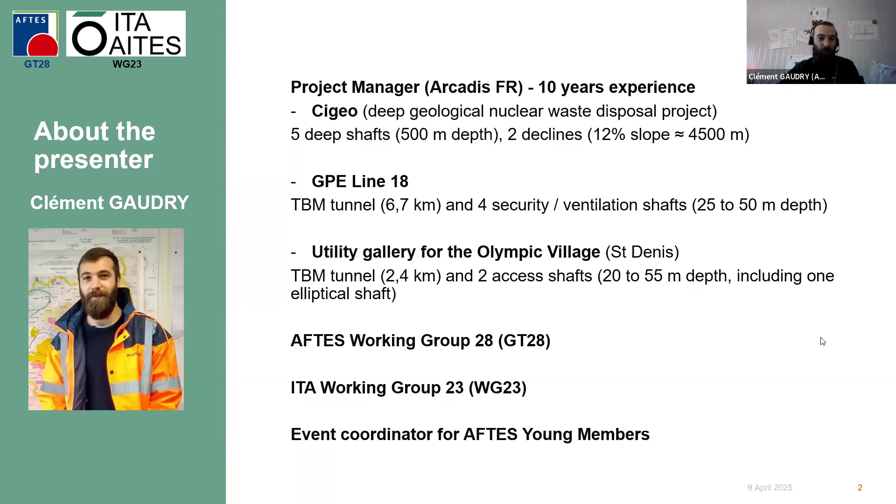A couple words about me that has already been presented by Siamak. I'm a project manager for Arcadis in France with 10 years of experience, involved in some major projects, mostly in France, and also involved in AFTES ITA, promoting the underground work to the younger generation through AFTES young members. So I'm an event coordinator.

A few words about AFTES. It's the French Tunneling and Underground Space Association that was created in 1972, so more than 50 years ago. It has more than 1,000 active members and currently 26 active working groups.

These working groups have been publishing more than 100 recommendations in French, and 60 of them have been translated in English. So not doing so bad with the translation so far.

AFTES is organized with 7 operational committees and 3 regional delegations, and the subjects being treated in the organization are very diverse. You can see we have subjects like planning, socioeconomic, legal aspects, ground conditions and geotechnical conditions, TBMs, conventional tunneling, blasting and mucking out. We have grouting and waterproofing, and transversal tasks, even maintenance and rehabilitation. So all the aspects related to underground works are covered by AFTES and the working groups.

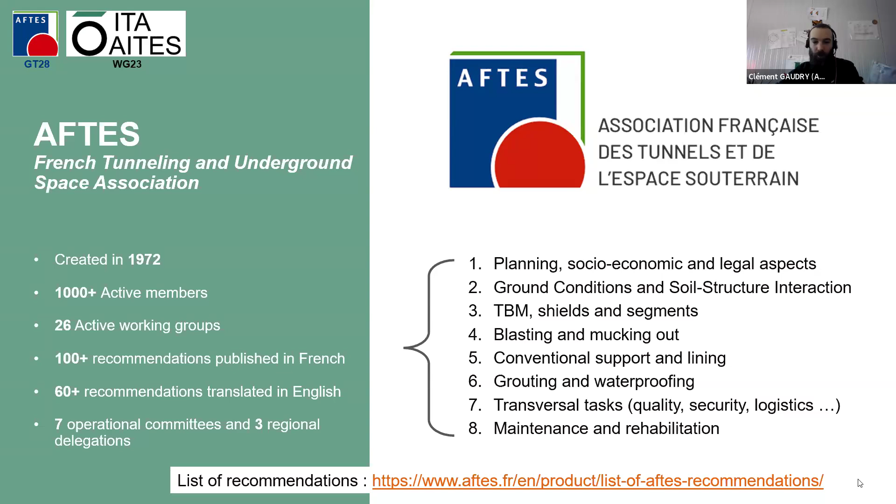So you will find here the list of the recommendations that have been published and the ones that are available in English as well.

This slide is to summarize the main references that exist about shaft design and construction, and that are the references we've been using mostly for the recommendations. So the first one is a handbook, the Tunnel Engineering Handbook, that has been published in 1996.

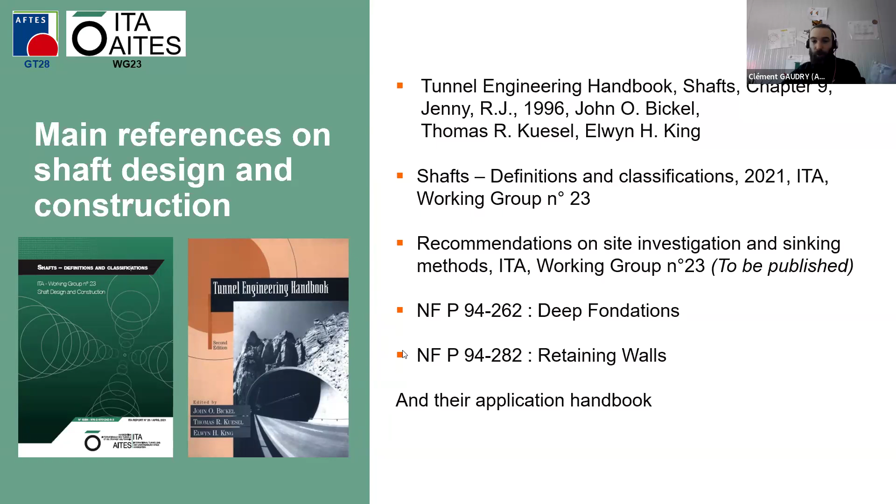We have the work of Working Group 23 from ITA that has been presented already by Siamak, so the definitions and classification recommendation published in 2021. A couple of recommendations to be published, I heard this year from Siamak, about site investigation and sinking methods, if I'm correct. We are also using the Eurocode 7 and the application norms, which are NF P 94-262 about deep foundations and 282 about retaining walls, and of course their application handbooks.

So as Siamak presented, we have two recommendations that have been published, one on deep shafts and inclined galleries, published in 2008, only available in French, and one on shallow shafts that is quite recent, published in 2023, and has been translated in English.

So what do we consider to be a shaft? It is a vertical or subvertical structure with the depth greater than the width, meaning it has a slenderness ratio greater than 1.

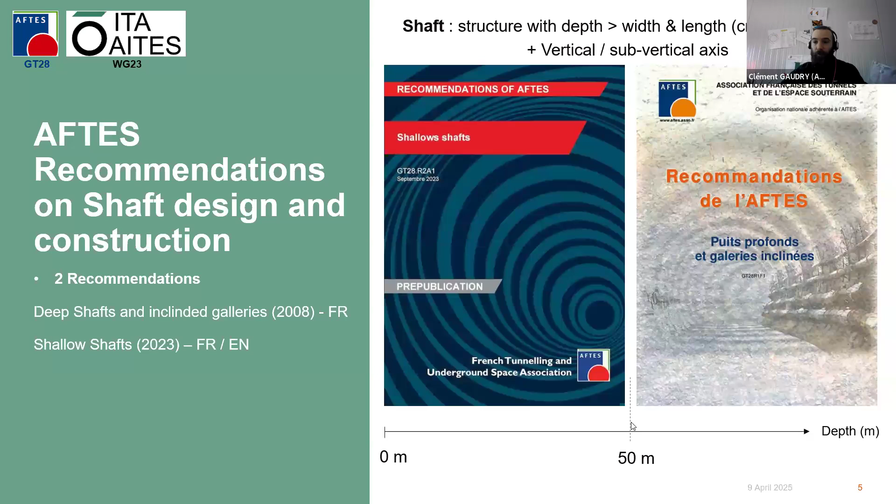The limit that we set between shallow and deep shafts is around 50 meters. Why this boundary? It's not really a strict limit, but it's based on feedback and experience. We found that under 50 meters depth there was no requirement to guide handling loads in the shaft, and safety standards would allow personnel to work during the excavation phase. This allows for the use of conventional civil engineering equipment and more traditional methods used in retaining walls.

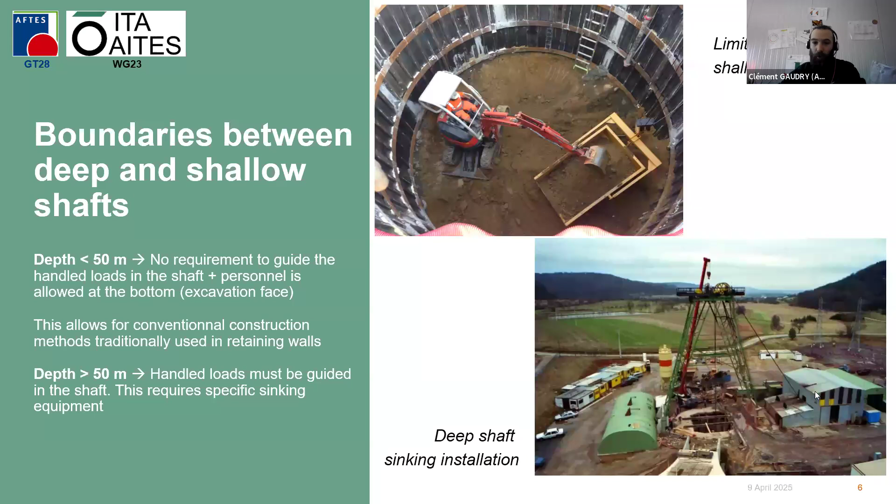Above a depth of 50 meters, what we'd see is guiding the handling loads in the shaft and specific sinking equipment. As an illustration, you can see on the top picture very simple equipment for a shallow shaft, and a whole equipment with a steel framework structure, winches, cables and everything for a deep shaft.

In terms of functionalities, we can set some differences between deep and shallow shafts. Shallow shafts are more accessible in terms of construction cost and planning duration. They don't require specific equipment and allow for a wider range of projects. For example, the project I'm working on right now, line 18 of Grand Paris Express - for a 35-kilometer metro line we have 22 service shafts, all of them shallow shafts.

Deep shafts, on the contrary, are long-term, higher cost, and higher risk projects, which makes them less common. As an example, in France in the last decade, I think we had about 2 or 3 projects total - very unusual projects.

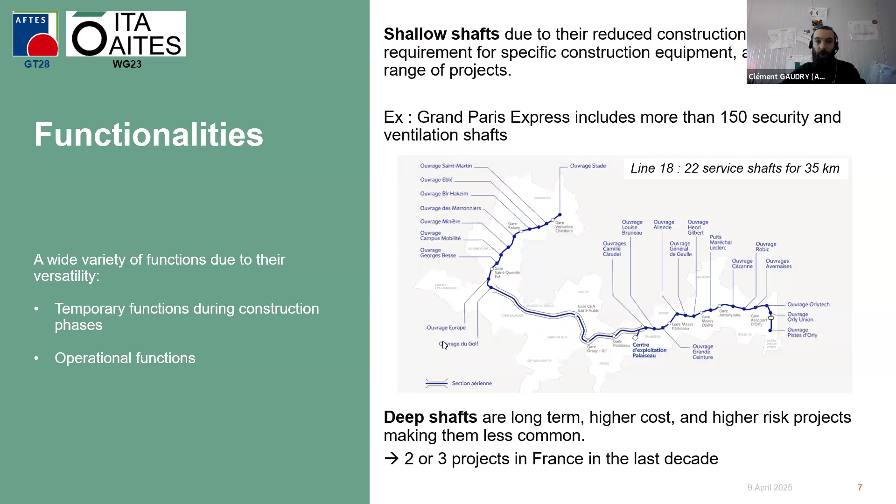That brings us to the first recommendation about deep shafts and inclined galleries, published in 2008. The goal of this text was to preserve the knowledge on shaft sinking, because the context was a scarcity of projects in France after the deep mines were closed, after the industrial era was ending.

The text was mainly focused on the construction methods and the equipment associated, and it does not cover shallow shafts, so less than 50 meters depth.

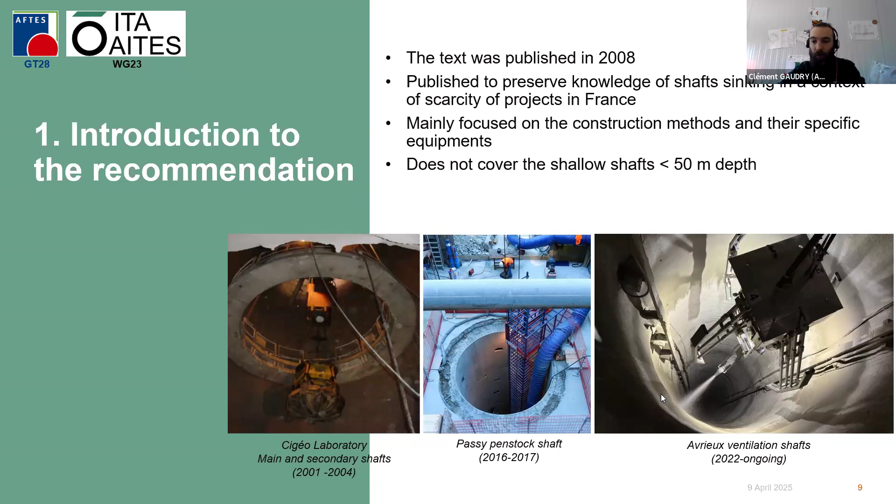You can see the last main projects of deep shafts that have been achieved in France: the CIGEO laboratory for future nuclear waste disposal, the Passy penstock shaft for a hydroelectric project, and the Avrieux ventilation shafts for the Lyon-Turin project.

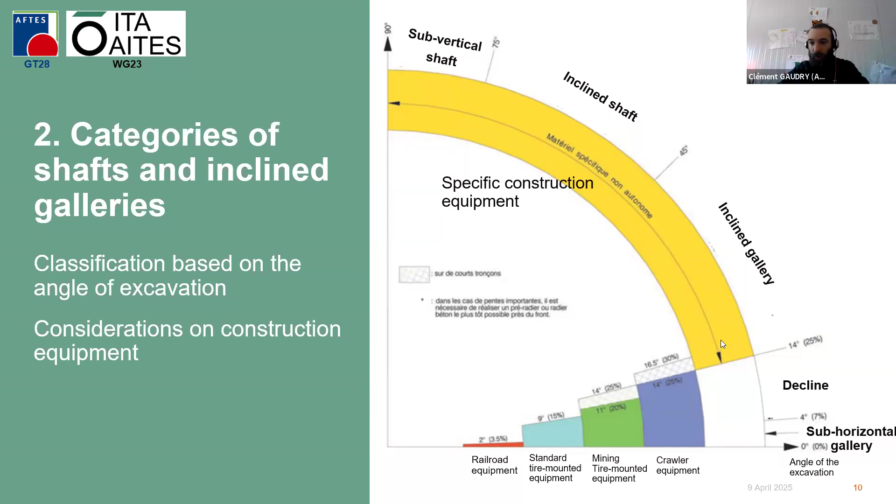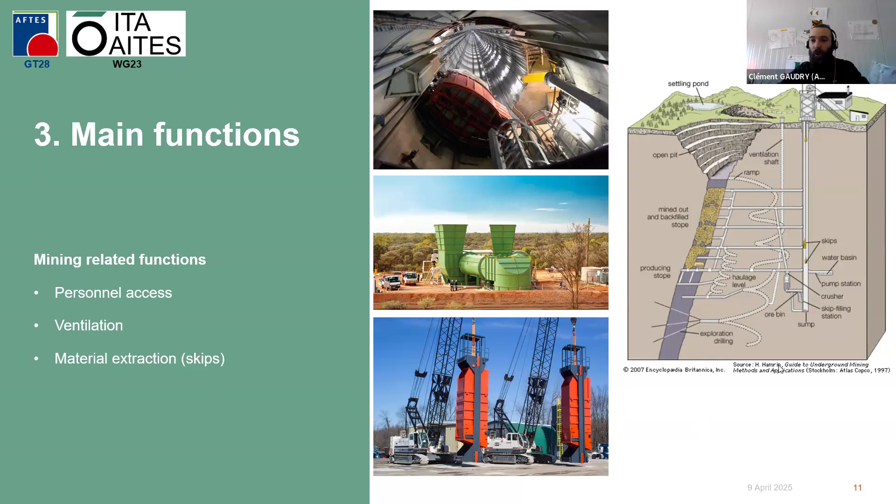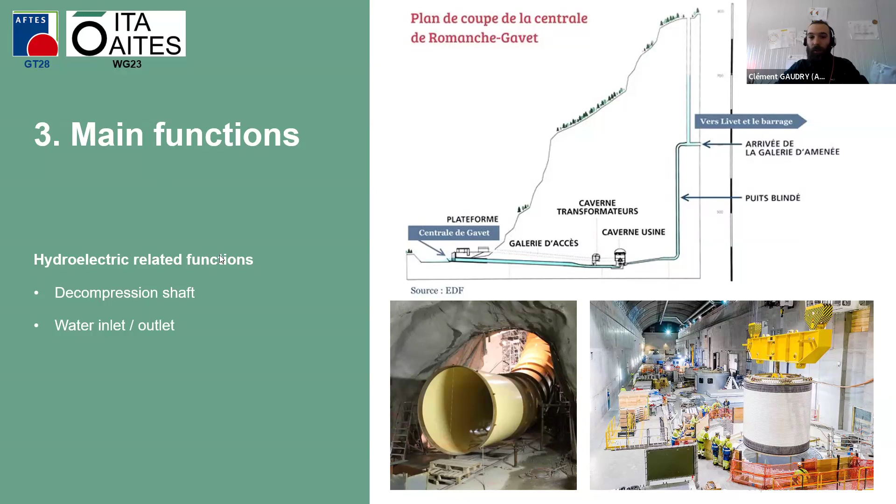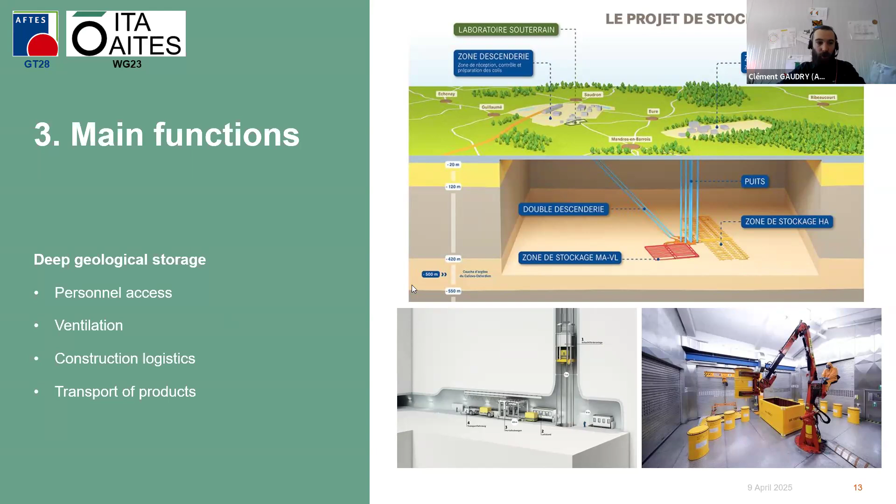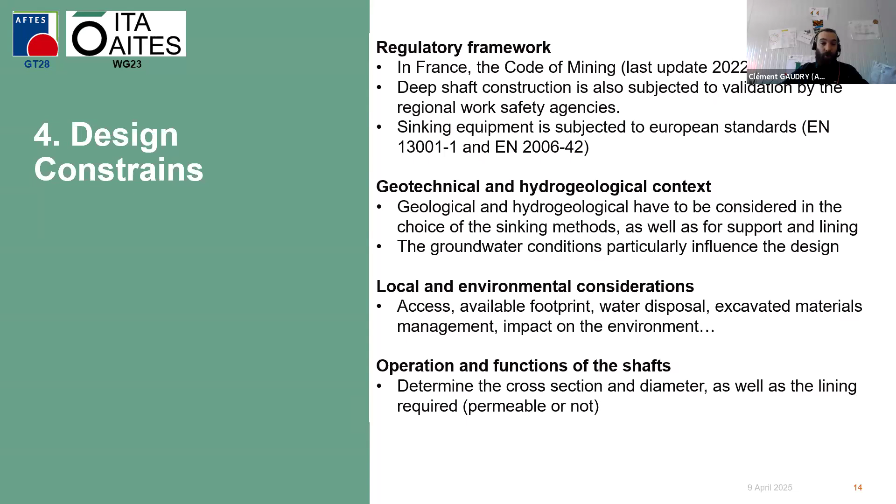The functions of the shaft in operation and also in temporary functions usually determine the cross section and the diameter of the shaft, and also the lining required, so whether it's watertight or not.

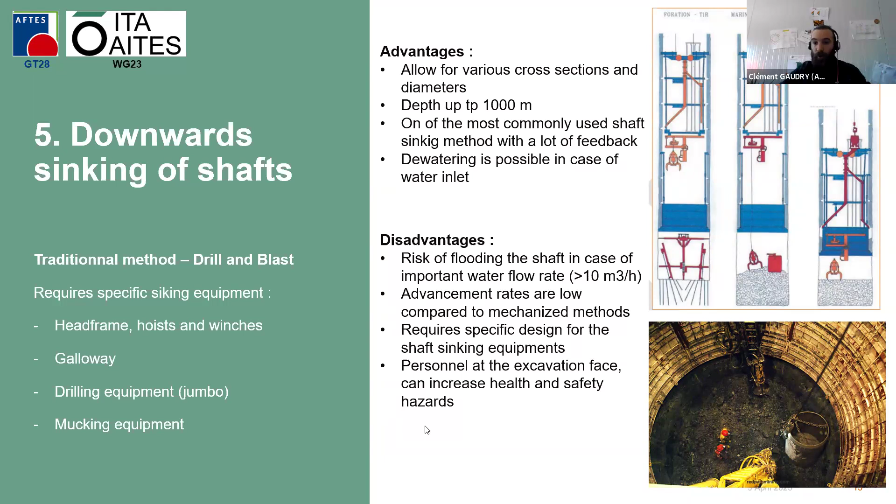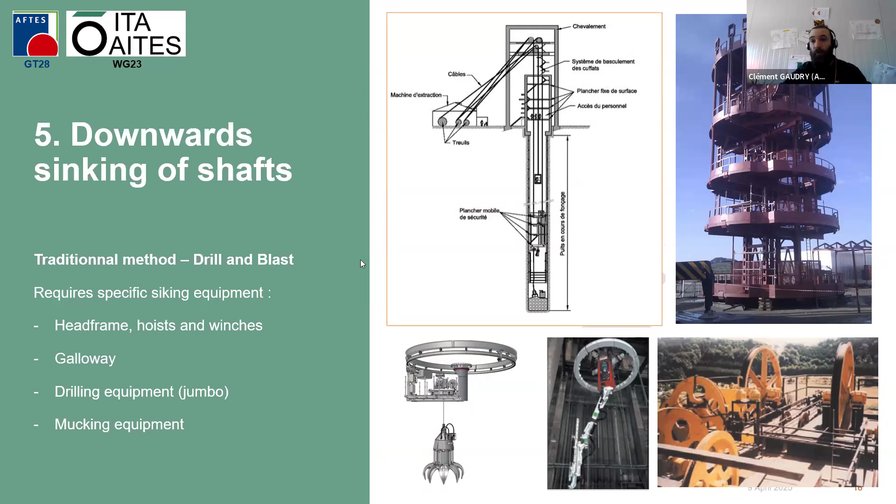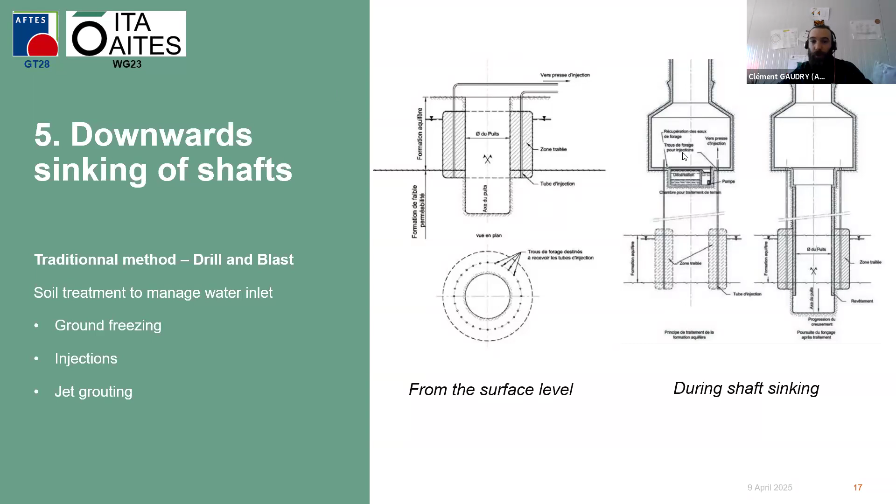I was mentioning the control of groundwater to manage the water inflow in the shaft during construction. In a conventional method, when the groundwater is near the surface, you use injections, ground freezing, or even jet grouting techniques to reduce the permeability of the ground. When it's a deep aquifer, you have to excavate a chamber to allow for pre-treatment before continuing the shaft sinking.

The lining and support usually associated with this technique, in terms of support, is quite similar to conventional tunneling: bolts, wire mesh, shotcrete, steel ribs. The main goal is to avoid instability of the shaft wall and to protect the workers. The lining, depending on the functions of the shaft and the geological conditions, can be cast concrete, so not watertight, or steel casing for watertight projects. Precast segments are also something that's been used quite a lot in shaft sinking and lining.

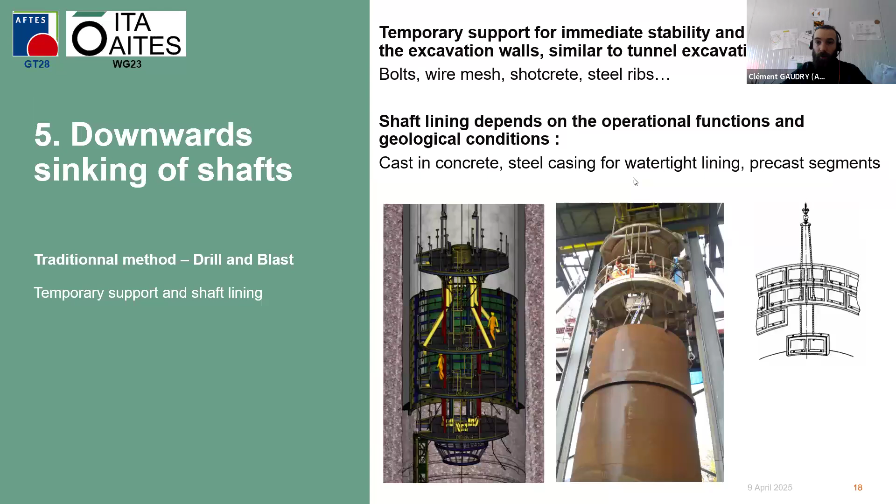The second method is what we call shaft drilling, or 'big hole' in French literature. It's basically drilling equipment, but bigger size, as you can see. The excavation is achieved in water or bentonite slurry, which allows for removal of the muck that is transported by the bentonite and then treated at a treatment plant, same as a slurry TBM.

This technique is interesting because it has good advancement rates. The bentonite can stabilize the shaft walls and also control groundwater inflow. The equipment is reusable for many projects, and you have no personnel at all in the shaft, so it's quite good for health and safety.

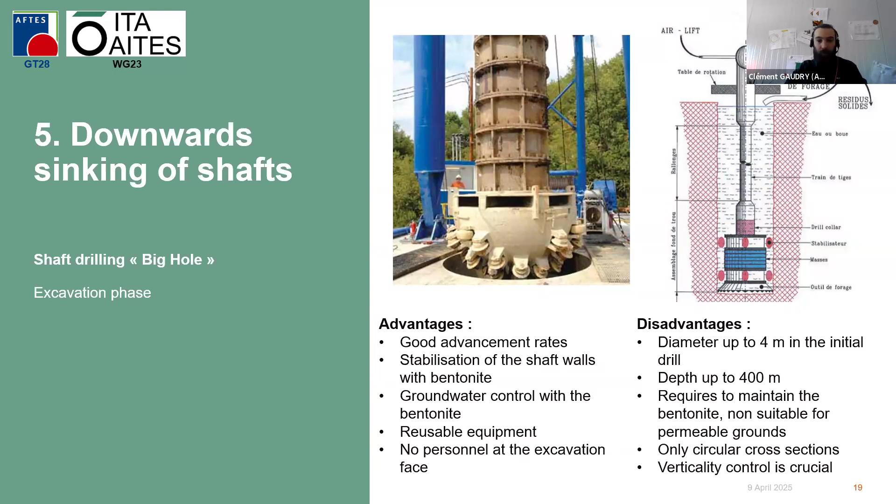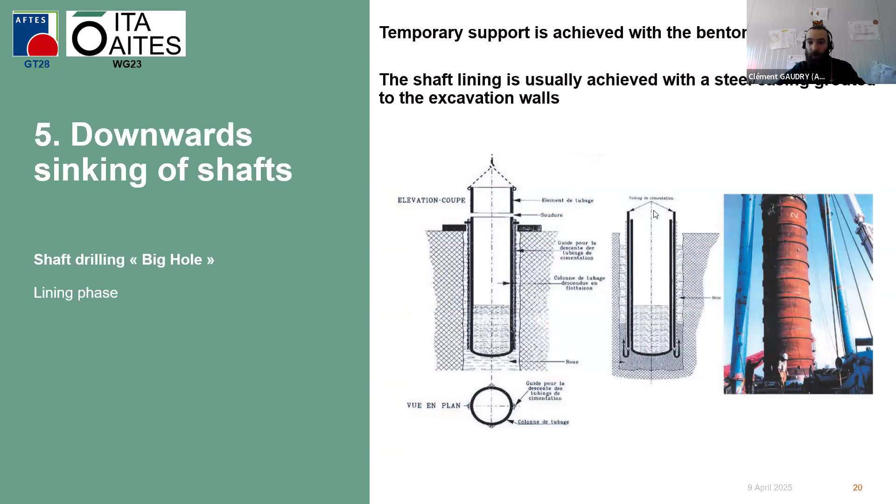And as with any drilling operation, verticality control is very important. The type of lining associated with this technique is usually a steel casing that would be installed in the bentonite and then grouted to the wall of the shaft before removing the slurry from the excavation.

Another downward sinking method is a mechanized shaft sinking method that has been developed by Herrenknecht quite recently. It's quite interesting because it can have faster advancement rates, and it's also safer for the workers because no one is at the front.

Here is a specific phase where the machine is not working, but usually the excavation arm works independently, doesn't need anyone at the front. And it's also more adaptable to different geological conditions.

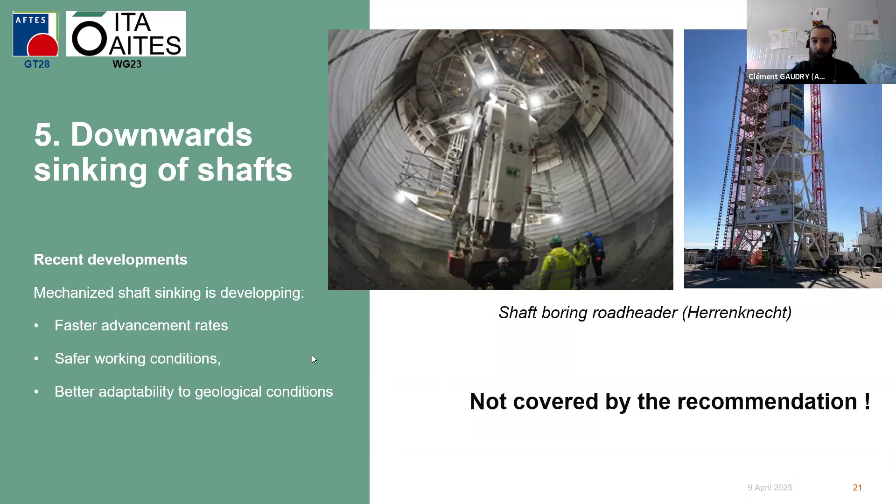This is not covered by the recommendation because it's quite a recent development, so it didn't exist at the time of publication of the recommendation.

So the second type of methods are the pilot hole sinking methods. It's basically raise boring, which I think is quite common and widely used, and shaft enlargement methods, either mechanical or with drill and blast, also exist.

These methods are interesting in terms of advancement rates. The equipment is also quite reusable from one project to another, and because it's mechanized you have very limited personnel, no personnel at the excavation phase. The equipment for raise boring is quite limited and can be installed in very small, very reduced footprint areas.

The disadvantages are the diameter, which is limited up to 5 meters in the initial drill. The depth for raise boring is also limited because of the possible deviation of the pilot hole.

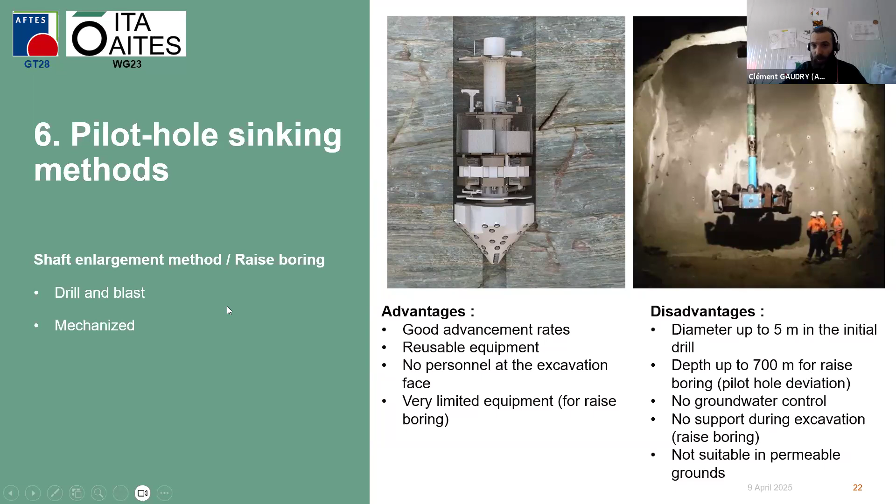You don't have any groundwater control -- that's a big problem for this kind of method. So in aquifers and permeable ground, it's not so suitable. And there's also no possibility to install support during the excavation with raise boring.

Incline galleries are mostly techniques derived from shafts or other methods. Here you have some illustration of a TBM for an incline gallery, and here a machine that is an auger boring machine.

Here are some methods that look quite similar to the drill and blast method, with some kind of working platform down the gallery, and here a head frame to suspend it.

And another method, I think that wouldn't be used anymore nowadays, is what we call in France the Alimak method, from the company building these machines, which is basically an elevator on a rail that travels usually upwards, to sink the gallery from the bottom upwards.

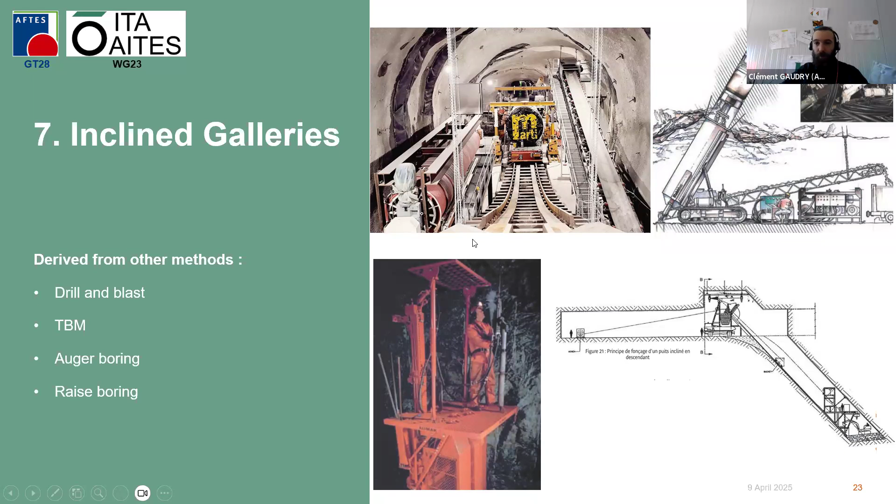The recommendation also includes some considerations for dimensioning. They're more general considerations about the loads that have to be considered for the dimensioning of both the support and the lining.

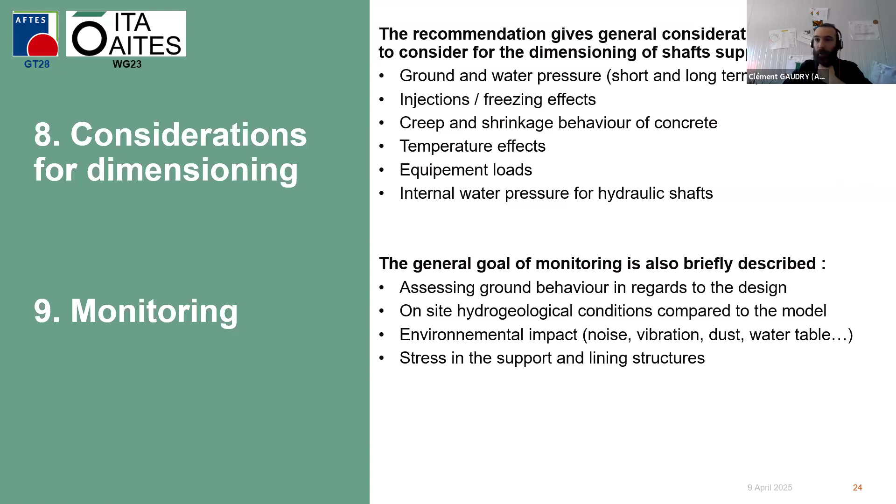Some aspects of monitoring are also discussed in this recommendation, but it's not a very developed part of the text, I would say.

The text also includes some appendices. The first one is a table with some shaft sinking references using different techniques -- quite complete, and mostly European references, but they go back to the 1950s or so. So quite a big body of work has been achieved with these tables.

There's also a comparison of the different sinking methods regarding different criteria: the conditions that are adequate for each method, the main characteristics associated with each method in terms of diameter, depth, the ground resistance that is allowed, the quality of the works, verticality, the excavated walls and whether they are regular or not, and the damage to the rock mass that can be caused.

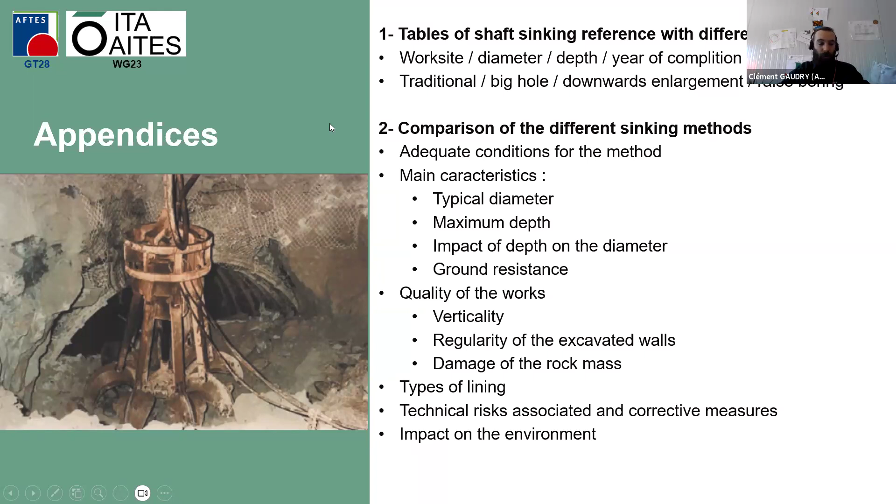Types of lining associated with each method are also mentioned, as well as the technical risks for each method and the main corrective measures that can be set. The last criteria is the impact on the environment. So quite a complete table, very useful, I think, for the selection of the sinking method.

Okay, so that sums it up for the first recommendation. I will now go through the second one, on shallow shafts.

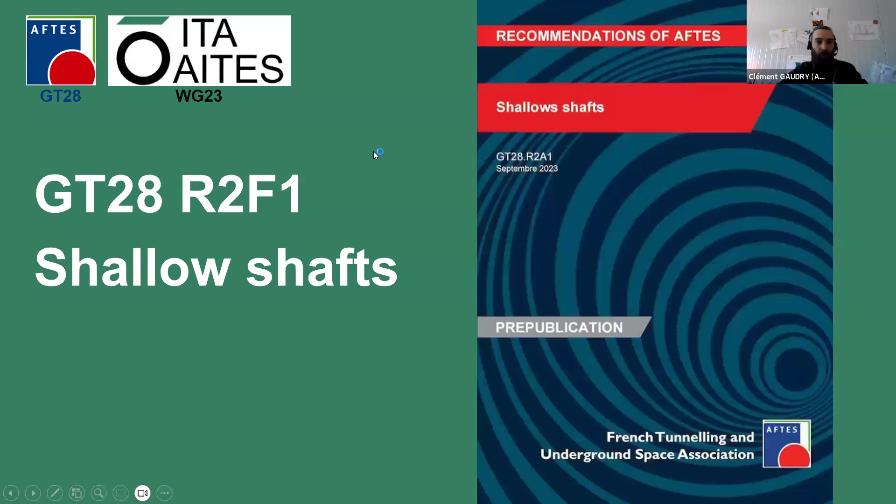I didn't participate in the first recommendation, but this one I've been part of it, so I know a little bit more about the history of the text. There was a first version that was published—I mean not published, but initiated right after the deep shaft recommendation.

It was submitted for review to the technical committee of AFTES but was not accepted. The main reasons were that the focus was mostly on construction methods, as the first recommendation was. It didn't really develop the dimensioning aspects, and it was a bit too general, not highlighting the specificities of shallow shafts.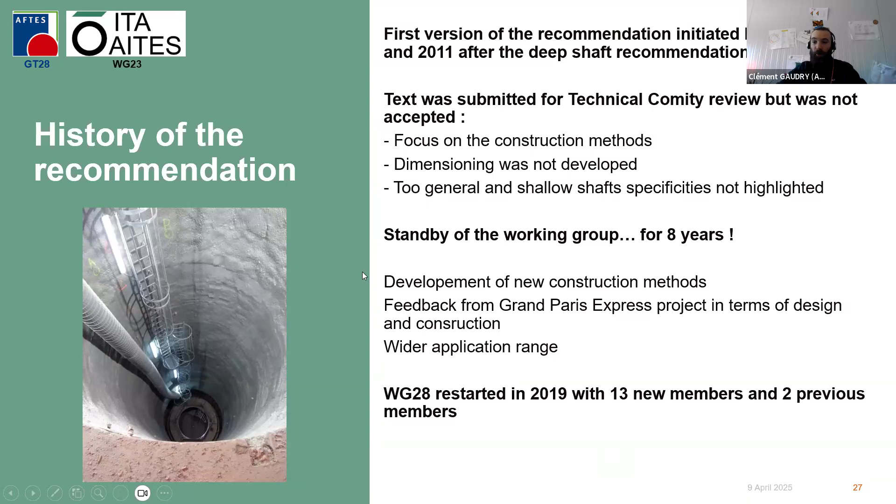That resulted in the standby of working group 28 for 8 years, quite a long time. Eventually, because recent projects brought feedback, new construction methods were used, and the application range, as I was presenting before, is more important than deep shafts. So it was decided to restart working group 28 in 2019 with 13 new members and 2 previous members, with the same animator, Pascal Guédon.

Here are the 15 members of the working group. What's interesting is to highlight that there were 3 young members under 35 years old—very diverse, from design companies, construction companies, a person from a control agency, and a shaft construction expert with more than 40 years experience.

We started the work in September 2019, right before the COVID-19 lockdown, and held 15 meetings over 2 years. That brought us to send the first consolidated version in December 2021, two years after the start of the working group, and the finalized version after review was published in May 2023.

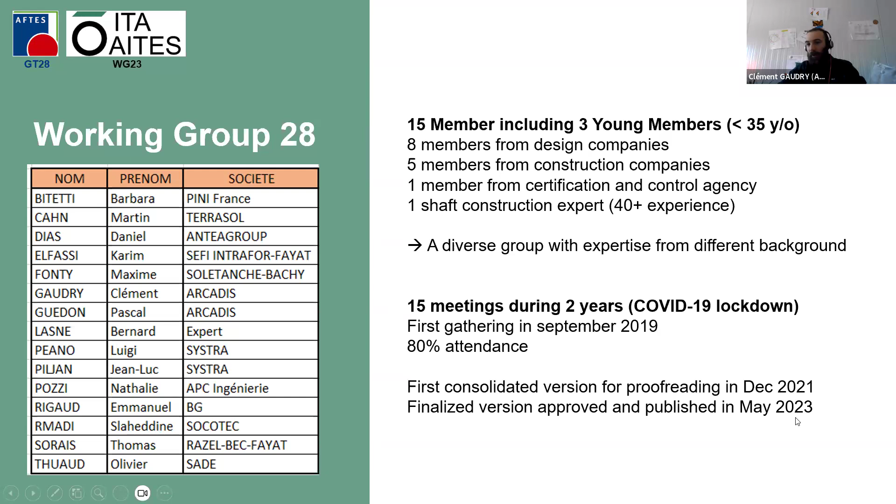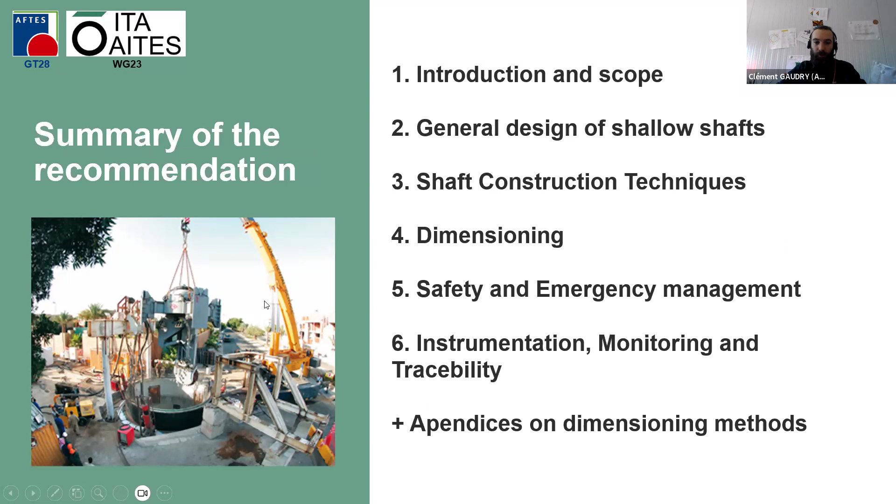So I will go into the different chapters of this recommendation and give you a bit of an overview of what they contain. The scope, as I said, is about shallow shafts, so under 50 meters. From the beginning, we wanted to set that the excavated diameter should generally be greater than 3 meters.

That's not an obligation, but we thought that for safety reasons it's wiser to go for bigger diameters. The largest dimension in the horizontal plane is less than 50 meters—that's the rule of the slenderness ratio, which should be greater than 1.

We didn't want to include public access structures because they have specific crowd management considerations that are not covered in the recommendation. It's important to note that this text can be applied to the upper part of deep shafts, the shafts that are used to introduce the shaft sinking equipment.

Here is a picture of a project that is actually not a shallow shaft—it's the IGR station in the Grand Paris Express project. It's a 63-meter diameter and 55-meter depth, so the slenderness ratio is less than 1. But eventually, the concepts developed in the recommendations can still be applied to this kind of structure.

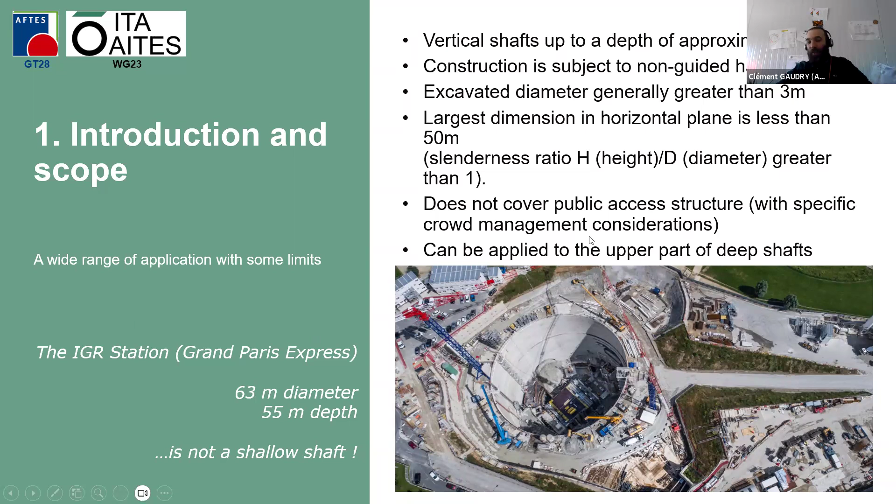In terms of functions, as I said before, shallow shafts have a wider range of use, either temporary or operational. You can see here, for example, a TBM launching shaft, here a typical access, and here an emergency exit and ventilation shaft that's apparently also used as a TBM dismantling shaft.

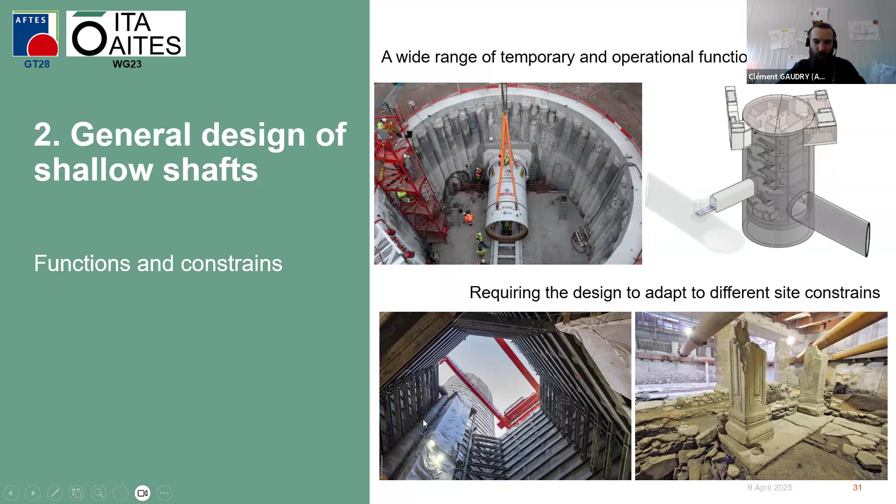Because shallow shafts have a wide range of functions, they also require adaptation to different site constraints. You can see on the first picture, for example, a shaft that's been achieved right under, I think, a 20-plus story building.

Because of these very different environments that we can have for these kinds of projects, data collection is very important, and we defined what we call the shaft model. As you can see here, it's a scheme that includes all the main information that would be required for a shaft project—geological, hydrogeological context, the geotechnical surveys, and the existing structures.

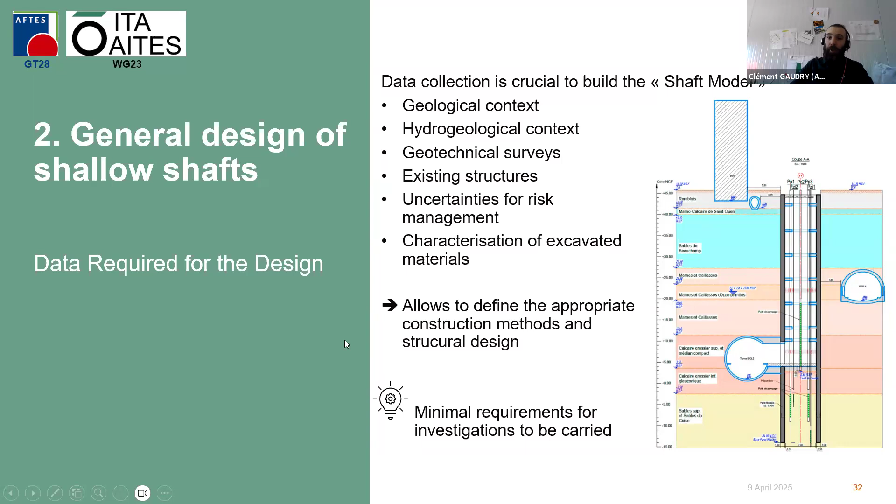You can see here a building, here an underground network, here another metro project or existing metro. It can also include uncertainties for risk management, whether the thickness of a soil layer or the level of the groundwater. Another important aspect nowadays is the characterization of excavated materials, which allows us to define the construction methods and structural design of the shaft. In the recommendation, we define the minimal requirements for investigation that has to be carried out for a shaft project.

This slide gives definitions of the terms. I think you would probably know these terms if you're in the tunneling industry, but we wanted to give a proper definition. The support is what you would install during excavation to stabilize the walls. The pre-support is installed before excavation—that would be, for example, piles or a slurry wall. And the pre-treatment would be methods that improve the characteristics of the ground, either mechanical characteristics or permeability.

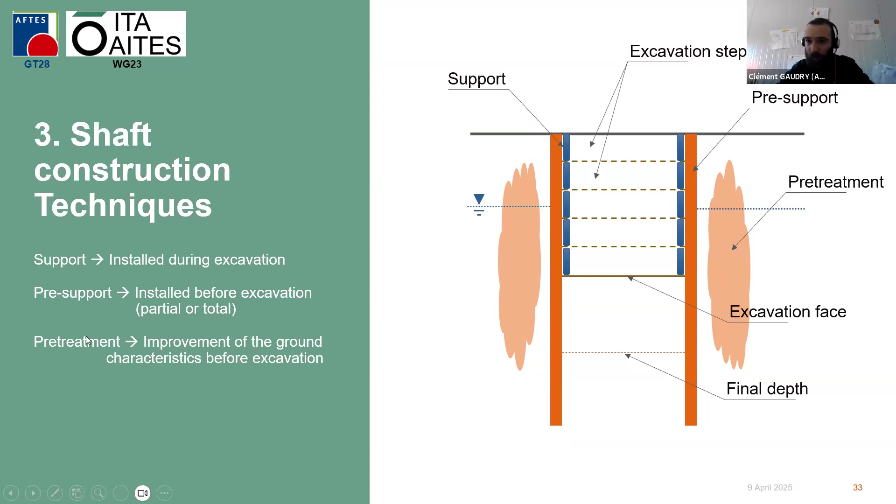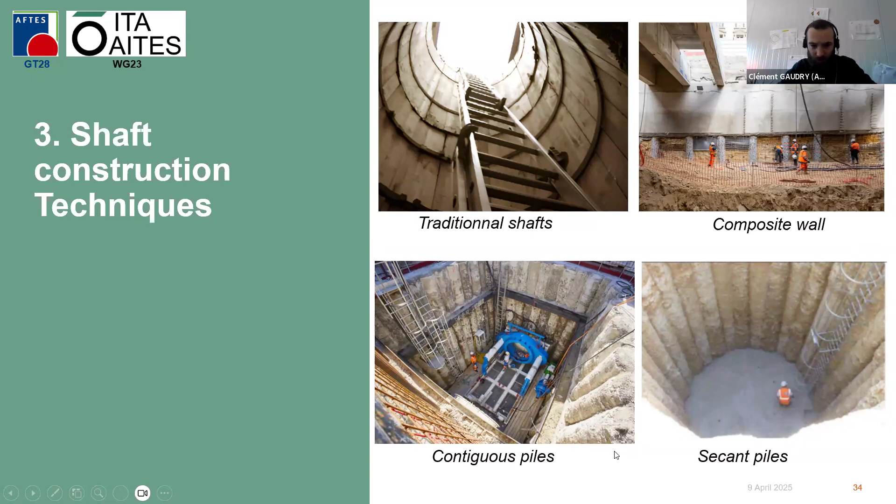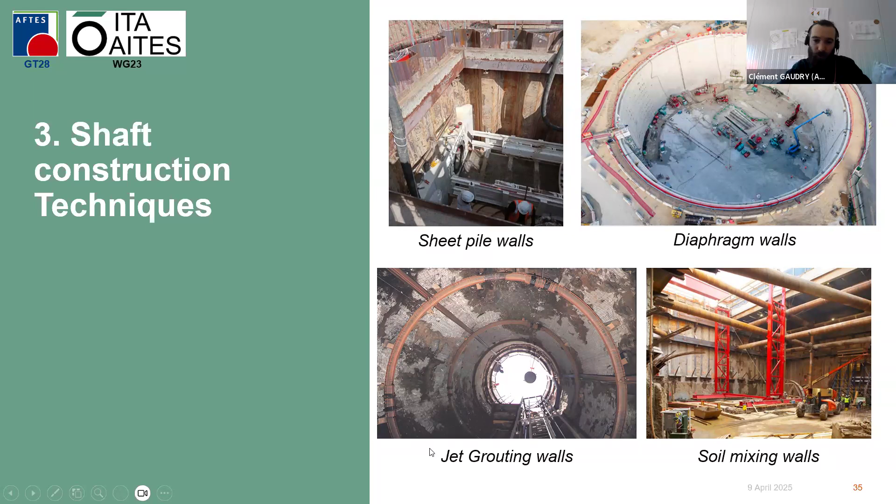The way we divided the different construction techniques is either by pre-support or pre-treatment, and we put them into each category. We have the traditional shafts that only have supports as the excavation is carried, composite walls with partial pre-support which could be piles or steel beams, contiguous piles, secant piles, sheet pile walls, diaphragm walls, jet grouting, and soil mixing as well, which are in between pre-support and pre-treatment.

We also have techniques like ground freezing that are carried out for shafts in water conditions, and a technique called caisson shafts, where you sink the lining as the excavation advances. This could be the traditional method, or the mechanized version developed by Herrenknecht, the vertical shaft machine, which is a caisson shaft with a mechanized excavation arm and hydraulic mucking.

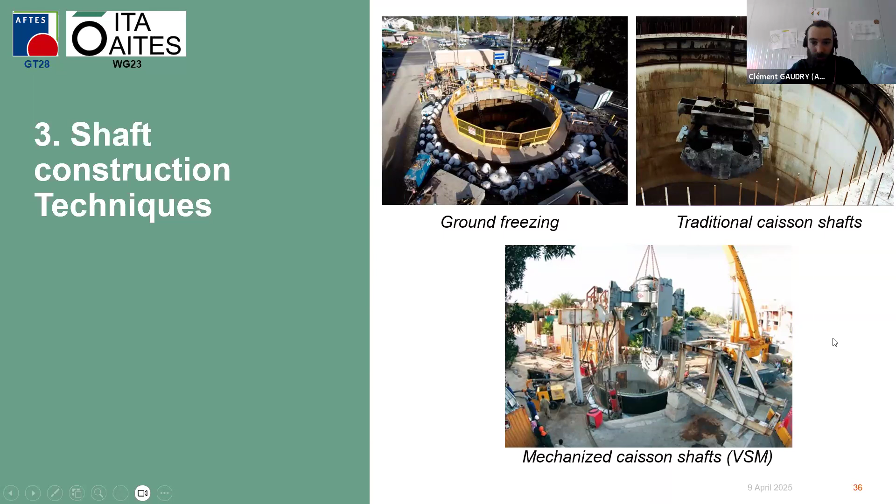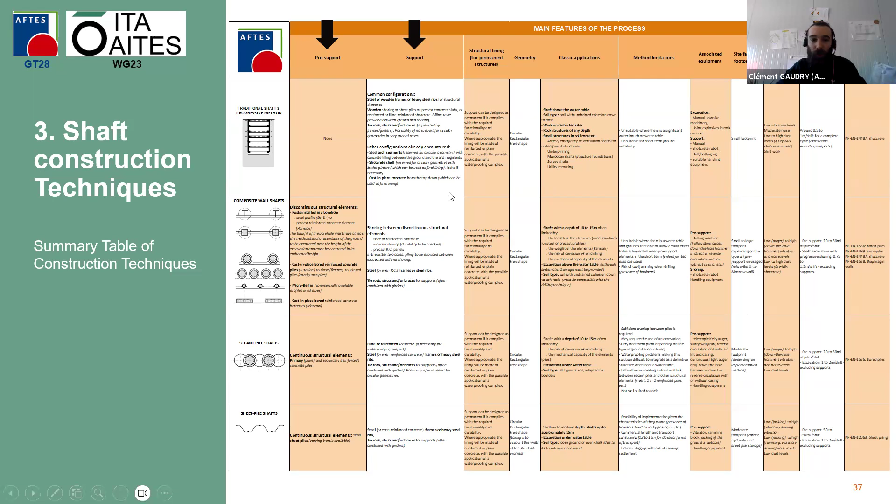We summarized all these different methods in a table, giving information about the pre-support or support included in the method, the structural lining associated, the geometry we can achieve, the classic applications, the limitations of each method, the equipment usually used for the works, the footprint required, the nuisance associated, the construction speed, and lastly the applicable standards in the European and French context. So it might not be applicable everywhere in the globe, but still interesting.

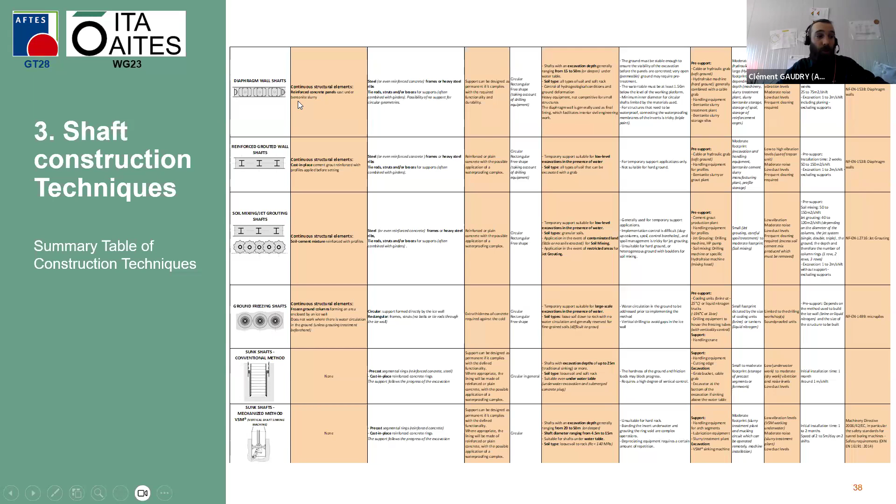So all the methods that I presented before are covered in this table. It's really a great tool to help decide which method to use for construction of a shaft.

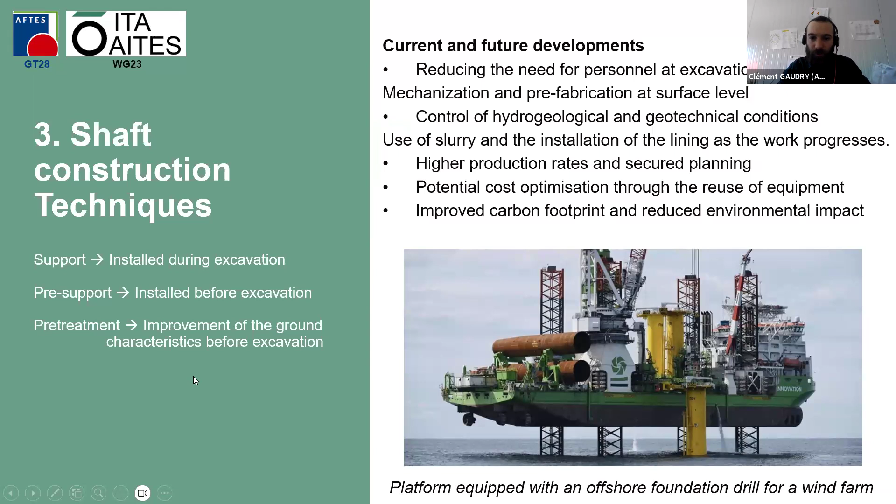We also have some considerations for current and future developments, mostly considering the mechanization of shaft sinking, and some aspects about the cross section of shallow shafts. Because the structural constraints are not as much as for deep shafts, it allows for optimization of the section into various shapes. As you can see here, rectangular cross section, here something that looks like a keyhole, an elliptical shaft, a bilobed shape - very different types of cross sections.

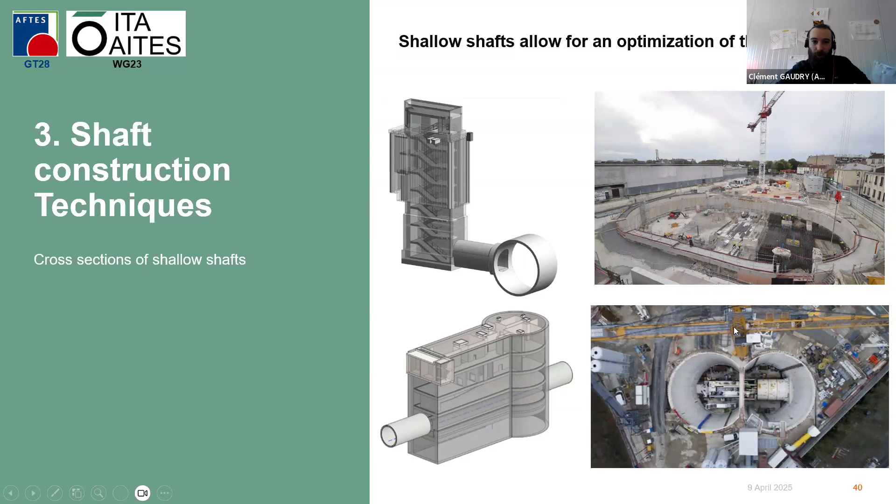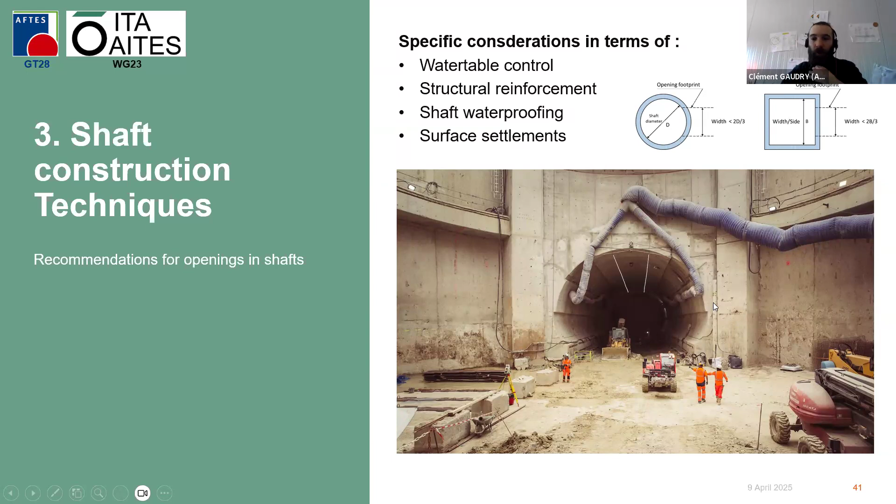Another important aspect is the openings usually carried out at the bottom of the shaft. Most projects require openings to connect the shaft to another underground structure, usually a tunnel. These specific areas require consideration of water table control and structural reinforcement. As you can see here, they cast a thick layer of concrete to manage the deformation and the structural resistance of the wall. Waterproofing in these areas is quite a challenge, and also the surface settlements that can occur.

The recommendation has a quite developed chapter on dimensioning, so I won't go through everything since it's quite dense, but it covers very different and practical aspects of dimensioning a shaft. It's not really a general methodology, I would say, but it gives a good understanding of the assumptions and what is required to consider for dimensioning a shallow shaft project. It also describes the usual dimensioning methods that are used.

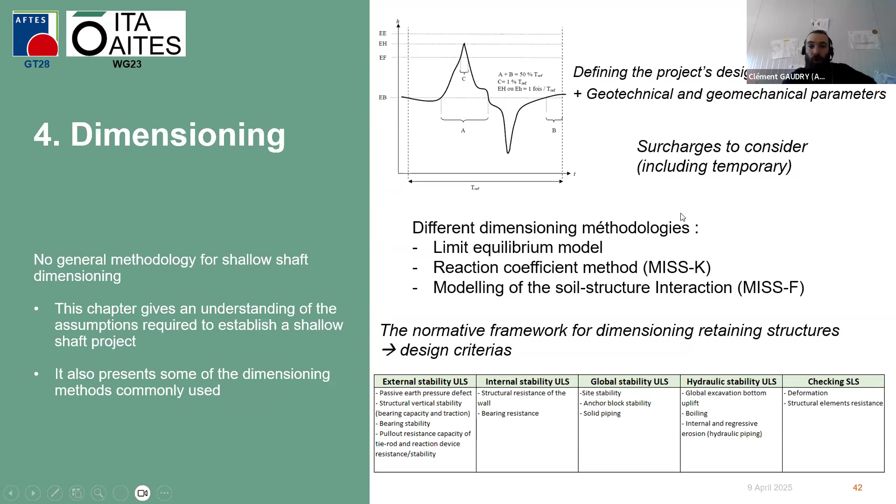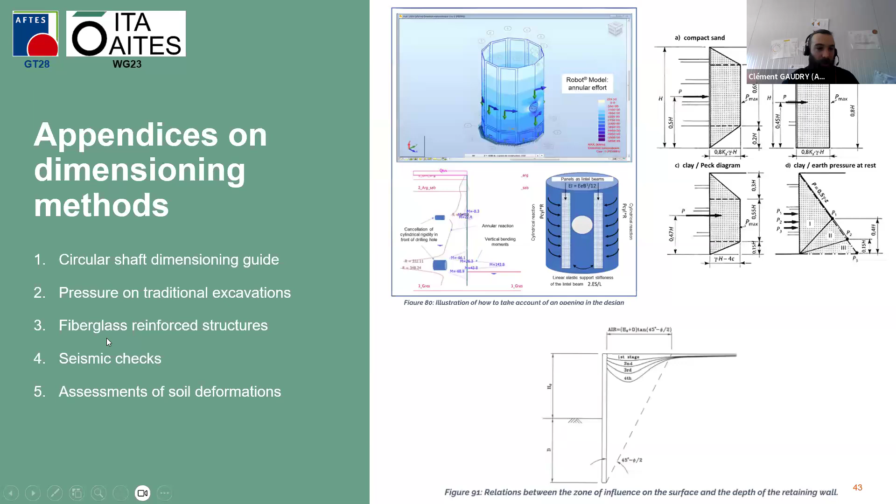Associated with this chapter, we have appendices on dimensioning methods that go into more detail on specific aspects - there are 5 appendices. The first is about the specific case of circular shafts and gives a dimensioning guide, including openings in the wall. We also have an appendix on how to evaluate pressure on traditional excavations, something about fiberglass reinforced structures, seismic checks, and soil deformation assessments.

The recommendation also deals with safety and emergency management. For this topic, what's important to remember is that local regulations can vary from one country to another, but every shaft project needs a risk analysis to be carried out, which allows evaluation of the main risks the project would face. The most common ones are co-activity between staff and load handling in the shaft, working at heights, reduced mobility for evacuation, and aspects like air quality, noise, and vibrations that can also be harmful for workers. It also gives some ways to mitigate these risks.

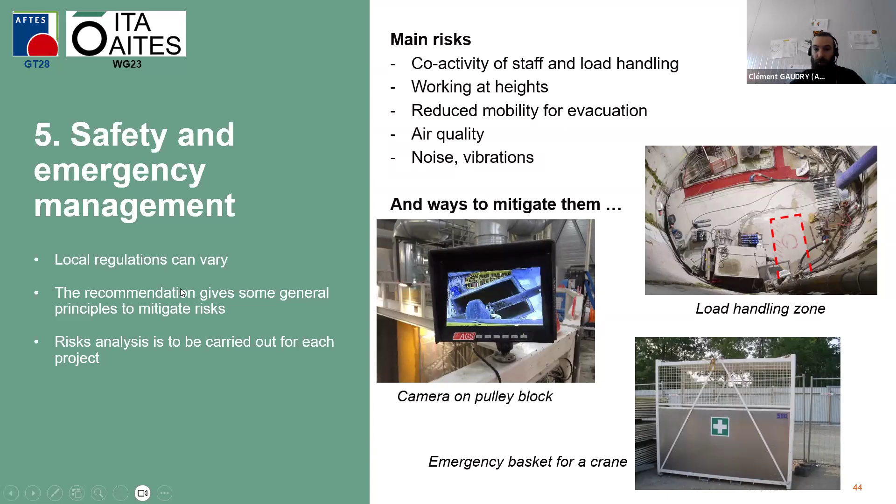The instrumentation, monitoring, and traceability is also described in this recommendation - in terms of geotechnical monitoring, how the ground is behaving in response to construction, strain and stress measurements in the support and definitive structures, and also environmental monitoring.

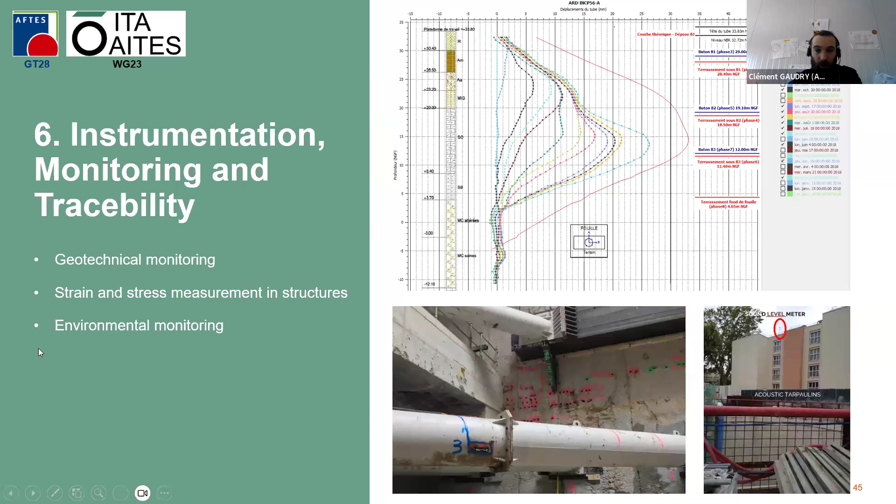During the work we did on this recommendation, we decided to initiate what we called shaft project data sheets. It's basically one document per project. We have around 30 projects listed, and we're publishing these data sheets in the quarterly magazine of AFTES.

It's called Tunnels and Underground Spaces, and they're also available for free access on the AFTES website. They're translated in English, so don't hesitate to go and check them. They're available for everyone. As you can see, they have a lot of information about the projects, the type of shafts with images, cross sections.

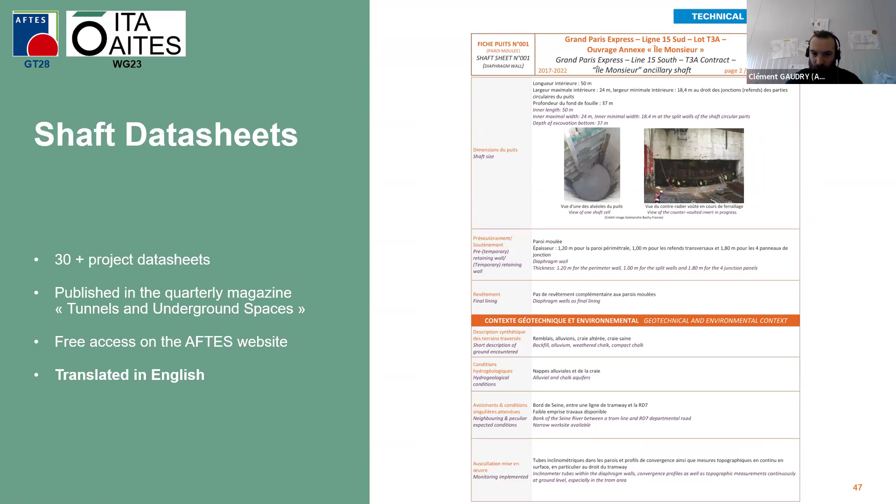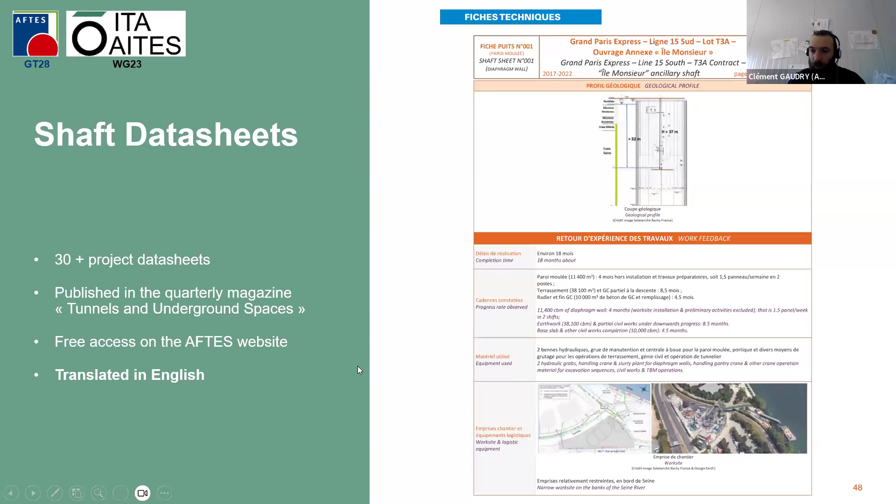What are the geological conditions of the project, and also the feedback on the works, so duration of the project and advancement rates - these kind of topics. So it's quite a complete database of projects.

I would finish this presentation with the perspective of Working Group 28. As I was presenting the data sheets, it's an endless source of work if we want, because we want to enrich this database with new projects.

Including the specific context, the innovative methodologies being used, and that's work we can carry on for many years. Also, a new version of the recommendation on deep shafts could be considered to include the recent developments. I was mentioning the shaft boring roadheader from Herrenknecht, the feedback of the recent projects in France and also worldwide.

Dimensioning methods could be developed in the new version, and also the latest update on regulatory framework that will probably appear really soon. And of course, an English translation would be quite interesting as well.

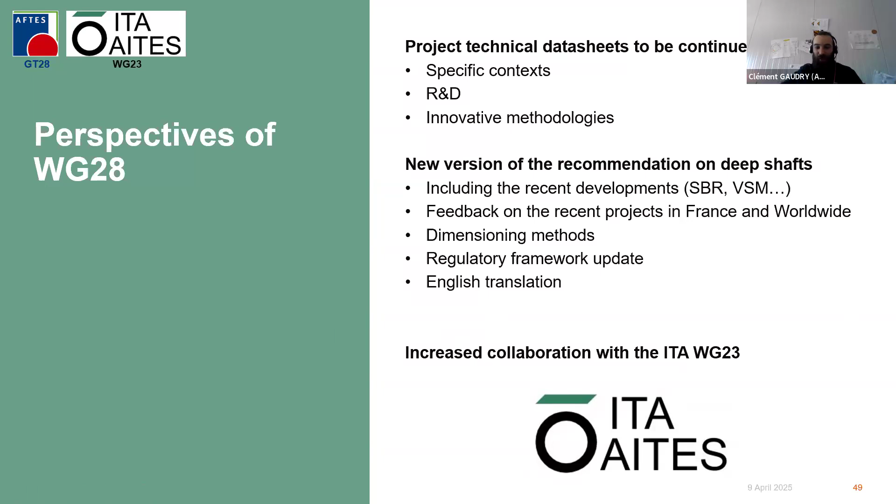I would like to take the couple minutes I have left to thank Pascal Guédon, who has been animator of Working Group 28, and Bernard Lannes, who's the expert in shaft construction. I want to thank them because they've been sharing knowledge with a lot of people, whether through the recommendation or also giving lectures.

It's very amazing to have these people sharing everything they know. They share their success, but also the projects that failed. They don't hide anything. It's for the profession. I think it's really important to have people like Pascal and Bernard. So thank you to you both.

And I think I saw Pascal in the attendance. So thank you, Pascal. That's it for the presentation. I will now see if there's any question in the chat.

Yes, Clement, thank you very much for your very interesting presentation. Thank you, Simon. That's our 12th webinar today.

Because we thought that it's good to keep in mind that there's a lot of parameters in the selection, and it's good to give engineers tools to decide, but not decide for them. So that's why we kept it in a way that it's a tool, but it wouldn't give you the answer at the end.

Sure, definitely. It has been very interesting. Thank you very much. Thank you for the opportunity to present, and it was a nice time presenting, for sure.